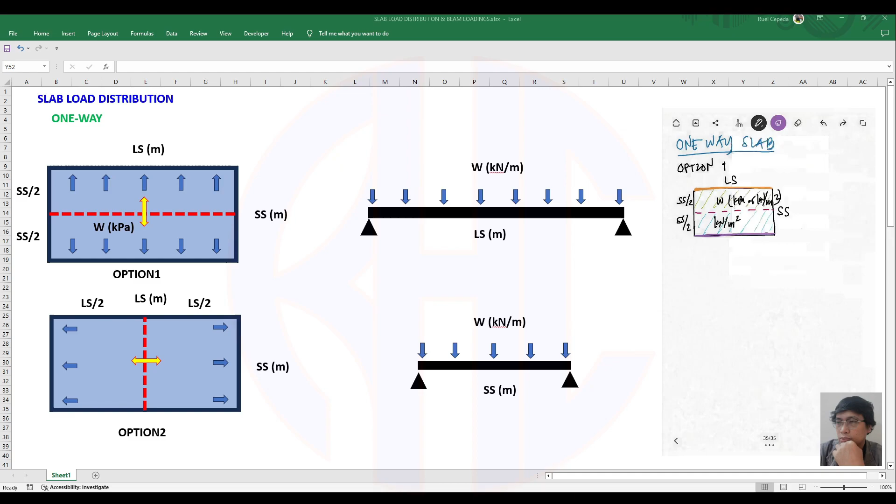Okay? So, this is the loadings na na-distribute natin. Pero, dapat, hindi na siya kPa or kilonewton per square meter. It should be naka-kilonewton per meter na siya. Kilonewton per meter. So, this is the length in terms of meter. Yun. So, kailangan natin i-convert yan. So, paano? So, therefore, of course, we need to derive the formula.

So, magiging formula natin dito, let's say, W na lang. Okay. W. So, W, kailangan ko makuha yung kilonewton per meter. For example, may data na tayo na W, sabi natin, surface load. Yung kinompute ninyo in terms of kPa or kilonewton per square meter. Kasi dapat naka-variable para sa derivation, para maka-create tayo ng formula. So, this is in terms of kPa or kilonewton per square meter yan. Okay? Then, kailangan ko lang makuha yung area na yan. Itong blue na yan. Top view yan guys. Ito top view or plan. Then this is the elevation.

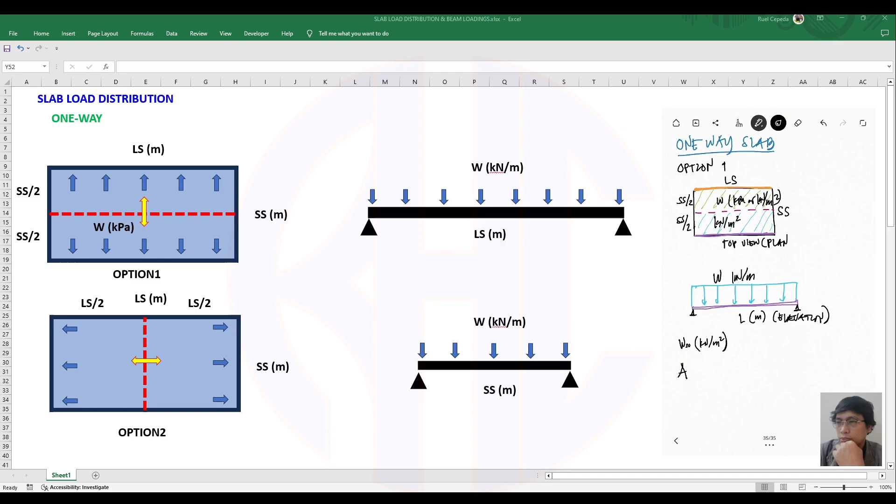Elevation. Okay. So, first thing, kailangan ko makuha yung area ng rectangle na yan. Okay, rectangle. So, anong formula niyan? So, SS over 2, kasi kalahati lang, multiply natin yung length ng beam, which is LS. Tama? LS. So, therefore, ang area natin is short span times the long span over 2. So, may area na tayo. This is in terms of square meter. Tama?

Then, kailangan natin kunin yung W in terms of kilonewton. Okay? W in terms yung concentrated load in terms of kN. So, ito, naka-kN per square meter yung data natin. So, kailangan natin i-multiply yan sa area ng rectangle. So, therefore, yung W surface load natin na in terms of kilonewton per square meter, yung mga load na kinocompute ninyo, i-multiply lang natin yan sa area of distribution load sa plan, kung makikita ninyo dyan.

So, that is SS times LS over 2. That is in terms of square meter. So, ito ma-cancel out. So, matitira niyan is W surface load. Ito, hindi na siya magiging surface load guys kasi nga na-cancel out na siya. Pwede ko sabihin sa kanya is W na lang. No?